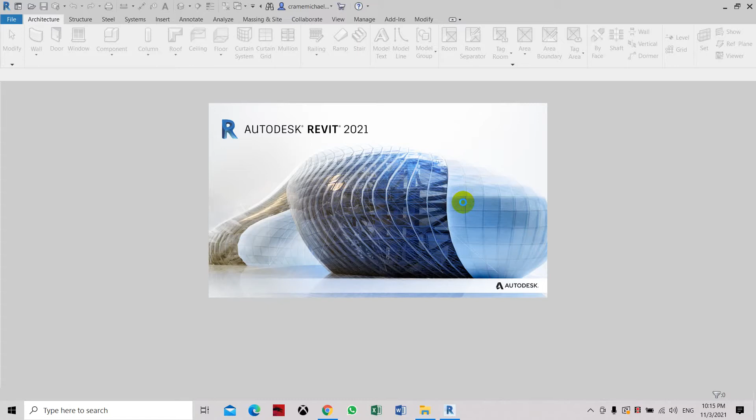Currently we are starting the Revit software. Revit 2021 is a combination of Revit architecture and Revit MEP, all combined into one software. In previous versions, you may have had Revit architecture or Revit MEP as separate software.

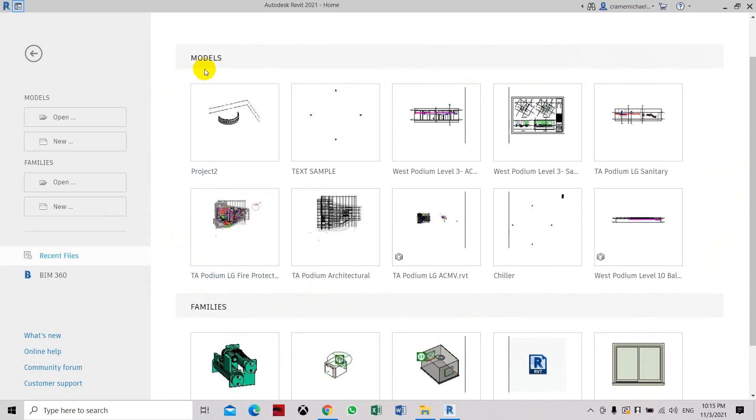This is the display window where you can see the models and families. Models are also called projects, where we have created all our drawing files; we name it as models. Families are group objects that we frequently use, such as equipment and plumbing fixtures, that later on we can insert into the project. In AutoCAD it is called blocks or W blocks, while the project is the drawing.

Let's set up the model. Here we're going to open up and use the default metric, which is architectural based. If you select the mechanical default, it will give you most of the families already loaded into the template, mostly for the mechanical part, while the architectural template has very few families uploaded.

If you want to set a different unit using interiors, you can use the browse button. Here you can see we are already in the library for the templates. You can go back, and here you can see there are other templates, such as imperial English, where you can use different units like inch, pounds, and foot. Let's go back to the previous one and select the mechanical default metric.

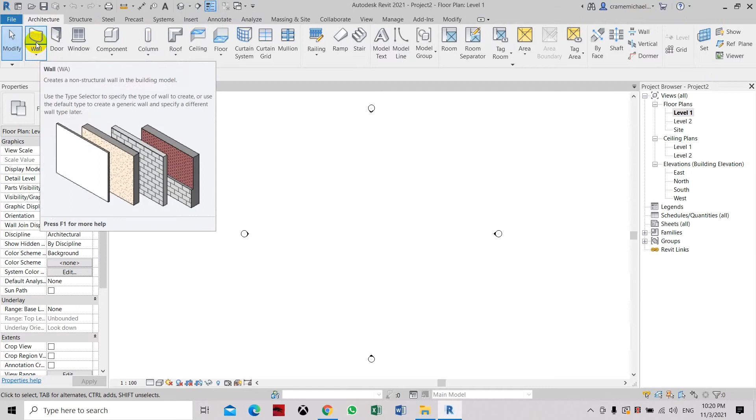First is the wall. Here, if you open and drag this down, you can see there are types of wall. The first is the wall architecture.

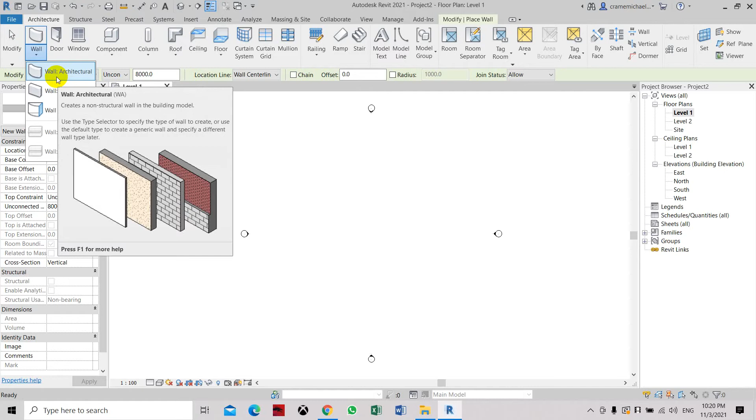If you are architectural base, you can select first and use wall architecture as your first object to draw in Revit. Here we also have doors, windows, component, columns, floor.

Let's say we want to create for level 1 a 4x4 meter room. So let's create wall. Here you will ask the base constraint, which is level 1. We're drawing on level 1, so we'll maintain level 1. Base offset, we are not offsetting anything, so the wall will be sitting on level 1. And the height unconnected, let's say we want it to be set up to level 2. The floor to floor default setting for level 1 and level 2 is 4 meters.

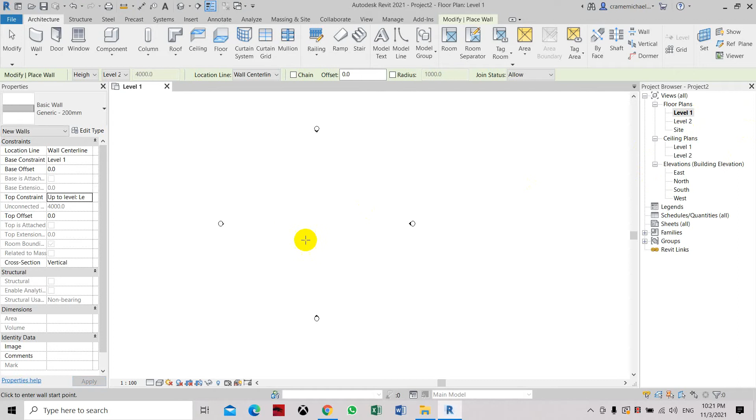If you want to change that, you can also go to the east. Here you can click the level, then you can change it to 5 meters if you want to increase the floor level. Then let's select that too. If you go to level 1 and see the default on level 1, it will show level 1, 5 meters.

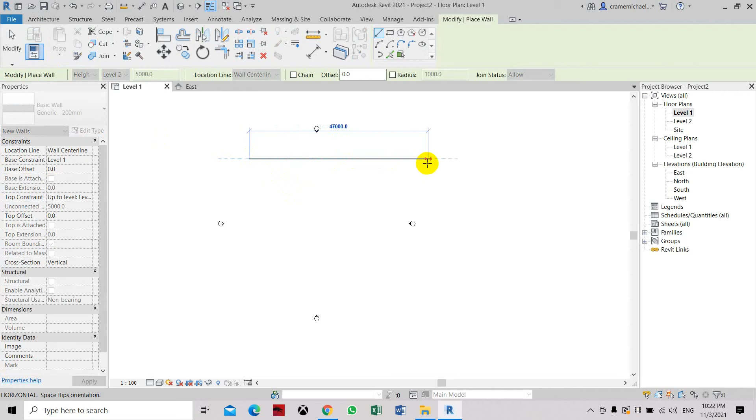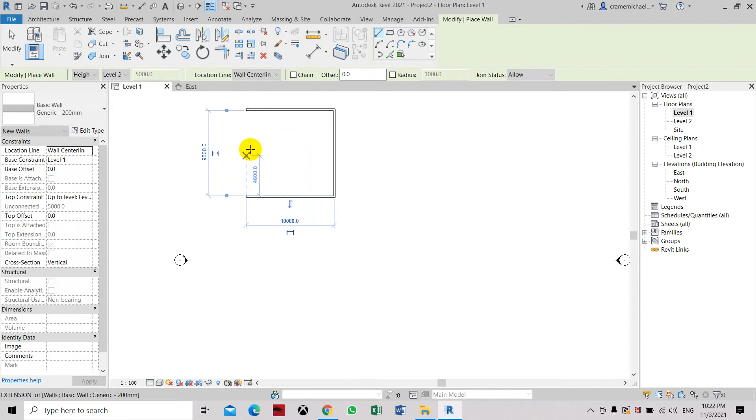So let's go back to level 1 and draw our first wall. Here you can select anywhere. Select, let's say, 10 meters. Let's create a square first. Select another wall, then select another wall, select point. You can just highlight it and it will be symmetrically in length. Then close the wall. So now you have 4 sides of the wall.

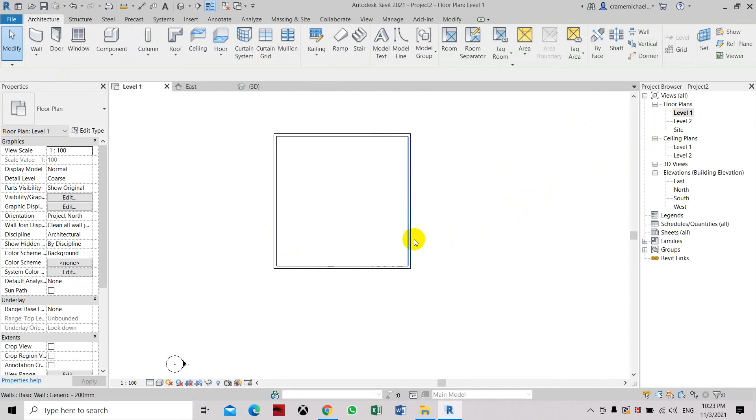Now we're going to throw a slab or floor slab into this room. So let's select the floor architecture. Here again, you are asked if you have any offset. First, you can select the thickness of the floor and the type of floor. Here there are a lot of selections. We'll maintain the generic 150. Based on head height offset, we're maintaining at 0, and level is level 1.

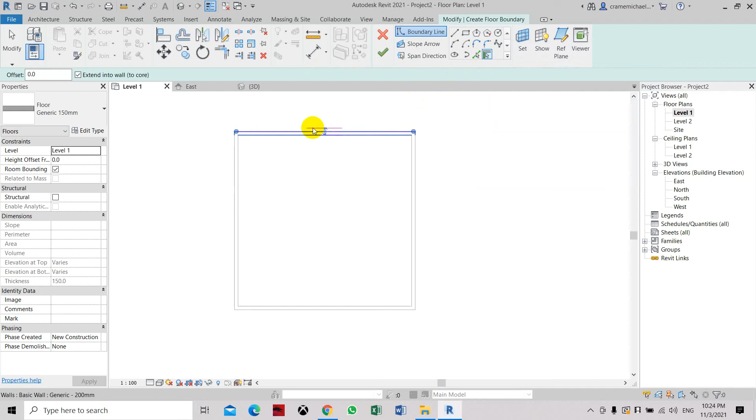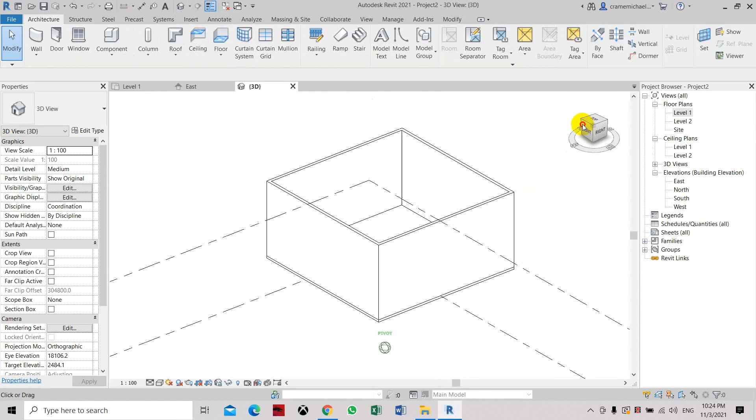Then you can create either a rectangle or select these pick walls. We're going to use the pick walls. Now it will ask you if it's an internal wall or external wall, so we're going to flip it. This means the floor slab will start from the external wall into the other side, which is the external wall. Select the 4 sides and then click the checkbox to finish editing. Click OK. So now if you go to the 3D view, you can see that there is a floor slab created below. So this is the floor, and these are the 4 corners or 4 walls that you have created.

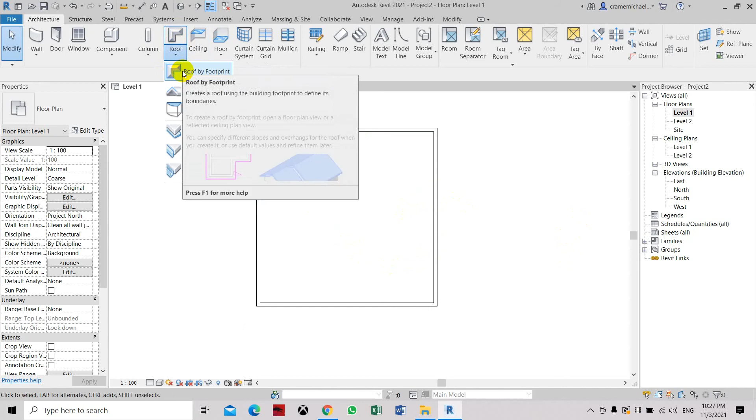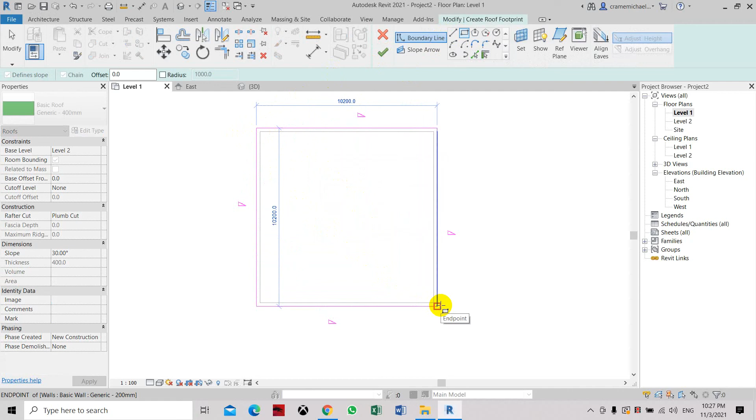Now we're going to create the roof level or roof for this room. For simplicity, let's just create a simple one. Here you need to go to the roof tool, select roof by roof footprint. It will ask you if you want to create at the lowest level, which is level 2, and yes. Now you can either create a rectangular line from here. Same thing with the floor slab, you can select a rectangular point and enclose it and then go to the next insertion point or close the loop of the roof boundary. Here it will ask you to lock this in place, so just click lock it, meaning it cannot be moved. So later you cannot accidentally move it. Click the check button.

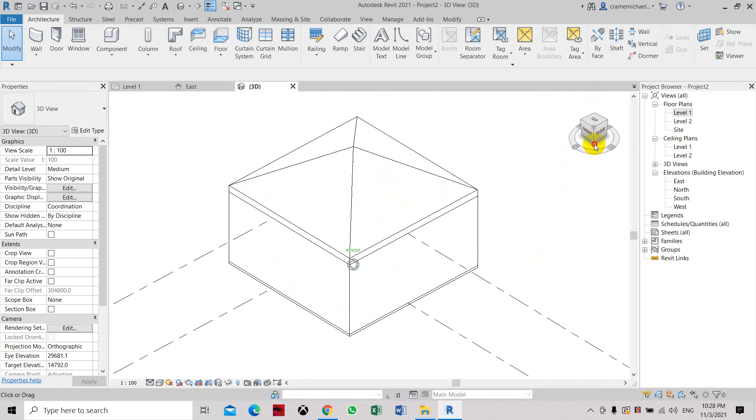When you set to the 3D view, you will see that we have created the roof for this room and completely enclosed this room with a floor slab and a roof cover. So that is how to start your familiarization with drawing in Revit. I will create another video to continue with this tutorial. Thank you.